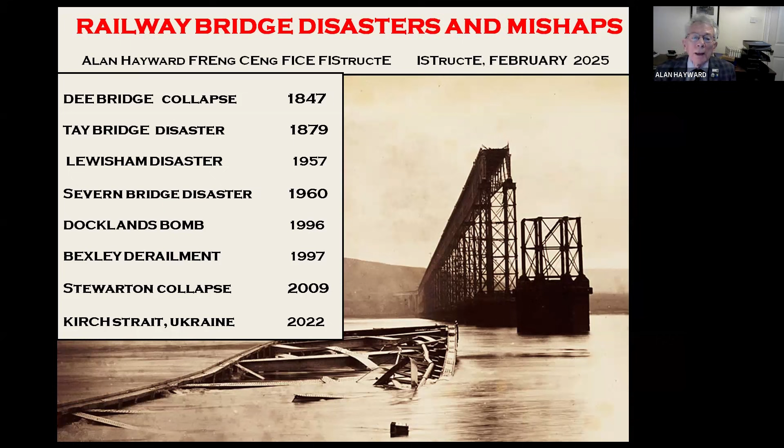The Dee Bridge then we'll cover first of all. The Dee Bridge was designed by Robert Stephenson in the mid-1840s, and it carried 3 spans over the River Dee just outside Chester, 3 98-foot spans, and was unusual construction because it was this cast iron stroke wrought iron trussed girders, which was in vogue at the time. There were about 60 bridges of this type around, going back to the 1840s, so it was quite a popular method of construction.

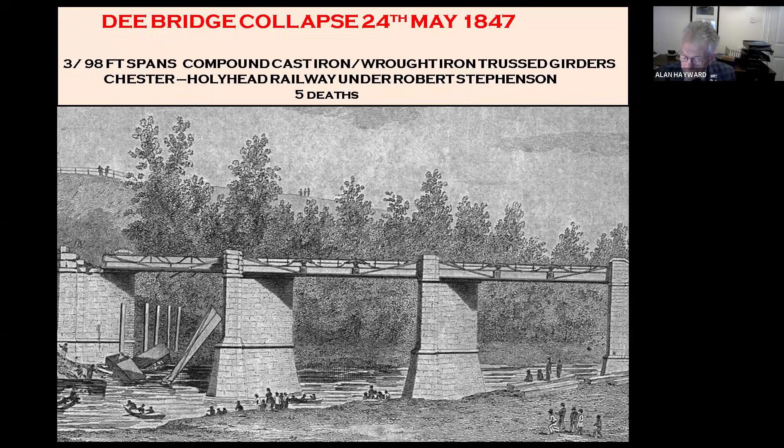But you can see here that on the left-hand side of the drawing there, that one span has partially collapsed, and there are remains of a train in the river, which was, of course, a disaster. 5 people were killed. So we'll go through what actually happened.

This bridge was constructed as part of the Chester and Holyhead Railway under Robert Stephenson, and he had finished the Dee Bridge some 6 months before the time of the collapse in May 1847. But another railway, the Shrewsbury and Chester Railway, was at a more advanced stage, and trains were already using the Dee Bridge under running powers, although the bridge had been built and was owned in effect by Robert Stephenson. So we have an interesting situation: the train which collapsed with the bridge belonged to the Shrewsbury and Chester, but the ownership and construction of the bridge was by the Chester and Holyhead under Robert Stephenson. So you have an immediate contractual situation.

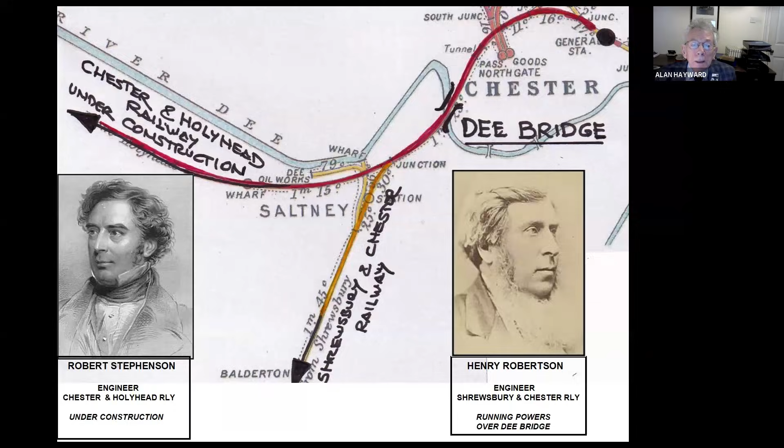So what happened on this day in May 1847? A train left Chester, bound for Ruabon on the Shrewsbury route, not the Chester and Holyhead. It departed 5 minutes late, so the driver was in a bit of a hurry. By the time he got to the bridge, which was only a short distance away, really 2 miles at maximum from Chester, he was doing about 30 miles per hour.

That doesn't sound very fast, but at the time that's a fair old speed actually. So he reached the bridge at 30 miles an hour, and as the locomotive got to the third span, it got across 2 spans, all right.

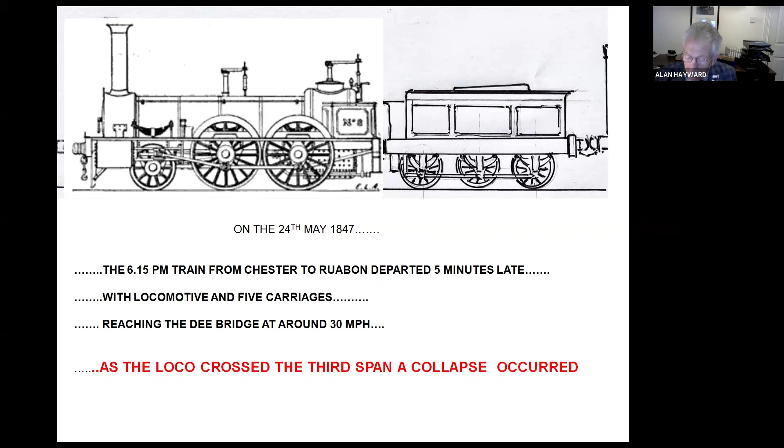A collapse occurred. You can see the locomotive looks a pretty old-fashioned thing, a very low-slung thing. This was a Stephenson patented long boiler locomotive. He made them with long boilers, so they were low down, giving more power in the boiler - a large boiler, but long and low down, so that it didn't sway around too much, because these early locomotives suffered from swaying or yawing.

So the train reached the third span, and the description I've given there comes from the driver's information at the inquest, the evidence he gave at the inquest. As he got to the third span, he felt a sudden sink.

The engine made a rear up, and we plucked it away. The tender sunk with the bridge, but we got it out. So the engine got across the bridge. The tender just about made it and landed on the abutment. And the 4 or 5 carriages, which are all very frail 4-wheel timber things, collapsed into the river.

The driver stopped the engine, realized that the stoker or fireman had already fallen off and been killed instantly. But the driver drove on to the next junction, reversed onto the other track, and went back over the bridge on the other track - which was a brave and perhaps foolhardy thing to do - to set up the warning and stop all trains.

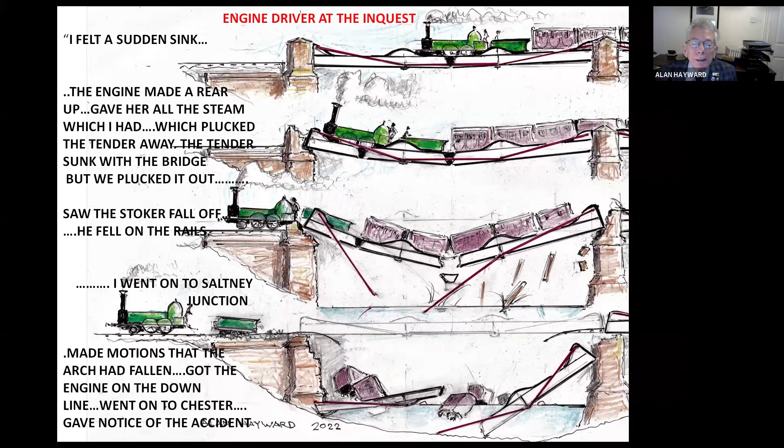So what was the bridge really composed of? Each track was a separate structure, having 2 cast iron girders, one each side, and spanning between. The deck construction was 9-inch square oak beams just resting on the edges of the flanges of the cast iron girders, with a timber floor on top. There was nothing in the way of lateral bracing at all, so the lateral stability of this bridge was almost zero. But the construction of the girders was the unusual thing.

Cast iron, of course, you were limited in the length you could practically cast - to about 40 feet. So faced with a span approaching 100 feet, they would splice 3 lengths of girder together, reinforced with this bulbous part over the top, and the thing was all bolted up. It was then reinforced to give extra strength, so they hoped, with these inclined wrought iron members, coupled at the third points to the bottom of the girders, and then angled up to engage with the ends of the girders, which had upstands at the ends.

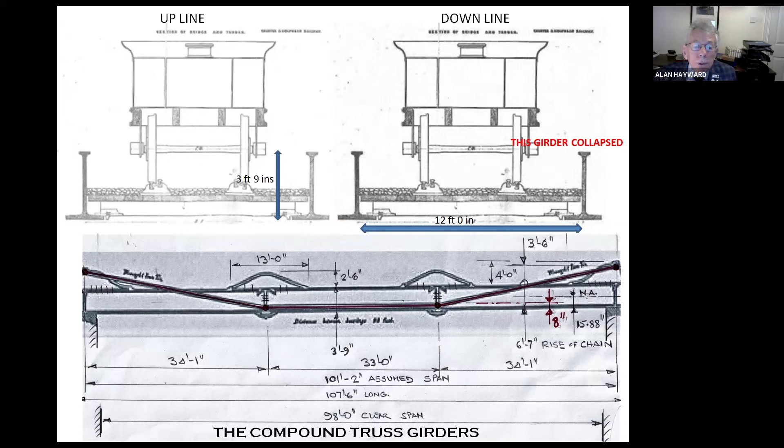So you had a sort of catenary arrangement of these chains. It was a compound truss, and the idea was you had the combined strength of the cast iron girder, which was of limited strength, strengthened - we hoped - by the wrought iron chains.

And the theory that was used assumed that the strengths of the cast iron girder and of the chains could be merely added together algebraically, having equated the deflections. The assumption for the wrought iron chains was that they were anchored at each end to an imaginary solid wall, if you like - in other words, a rigid arrangement, so that it would act as a fully restrained catenary. That was the idea.

So the sum at the bottom there is just working out the strength, assuming that the cast iron had an ultimate strength in tension of 6.5 tons per square inch, which was a fairly conservative measure of the ultimate strength of the cast iron in tension. So you added these two strengths together and then worked out your live loading and dead loading, and an apparent factor of safety against collapse of 4.3 - in other words, more than 4. And Stephenson had expected a factor of safety of at least 3.

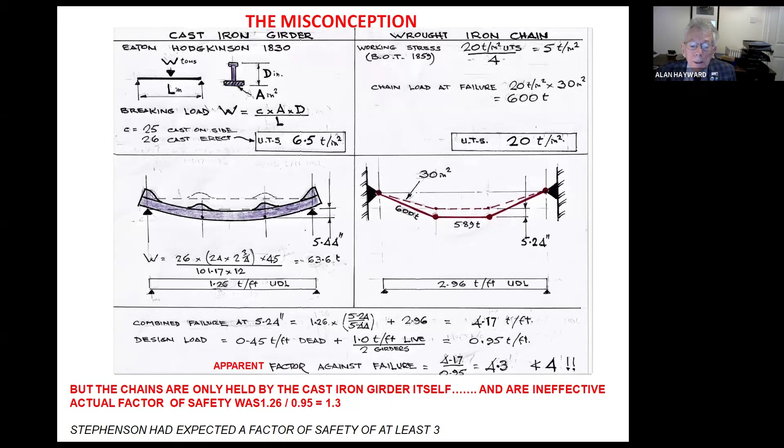This whole thing was a misnomer, really. And the best way I can describe it is this rather silly way of imitating: a man gets into his very flexible bed, which seems to sag in the middle, with bed heads which extend up at the ends, and he decides, I want to stiffen this bed up. So I'll get a strong piece of rope and anchor it rigidly at the ends to the bed heads, and anchor it underneath the bed itself, and that will surely make it a lot stronger.

But he jumps into bed and it deflects the same amount. The ropes or the chains are of no use whatsoever, because what they are doing is pulling in the ends of the girder and giving an additional bending moment. In fact, the bending moment, if you work it all out, is exactly the same as if the rope or the chains were not there. I won't bore you with the mathematics, but if you go through it, you'll find that the ropes or chains in this system are of no use, simply because they are anchored to the thing you're trying to strengthen.

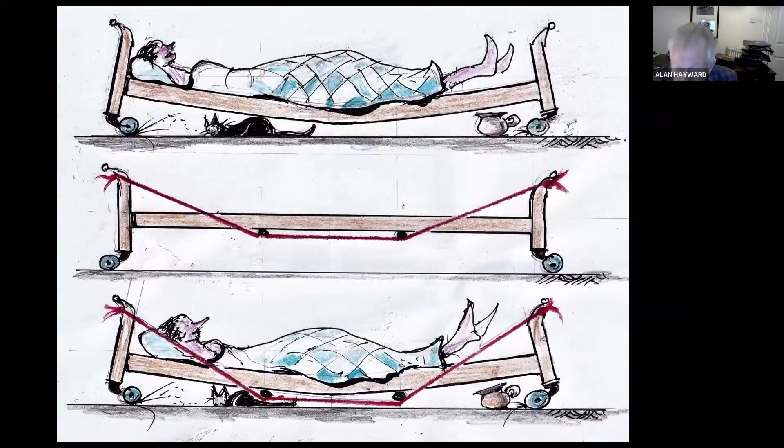So what caused the collapse of the bridge? Was it just due to this misnomer? Well, in fact, it was mainly due to that. So the main cause is the misconception, because if you just take the strength of the cast iron alone, you get a factor of safety not of 3 or 4, but of 1.3, which is dangerously low, of course.

But there were other factors on this bridge - straws which broke the camel's back, I called them. The first one is that they put some ballast onto the deck on the very day of the collapse. Stephenson had this ordered because he was afraid of fire hazard, because a bridge on the Great Western Railway under Brunel a few days before had caught fire and damaged cast iron beams underneath. So Stephenson got worried and thought he'd better do something about this on the Dee Bridge, and put some ballast down. But that ballast, additional weight, reduced the factor of safety now down to 1.1.

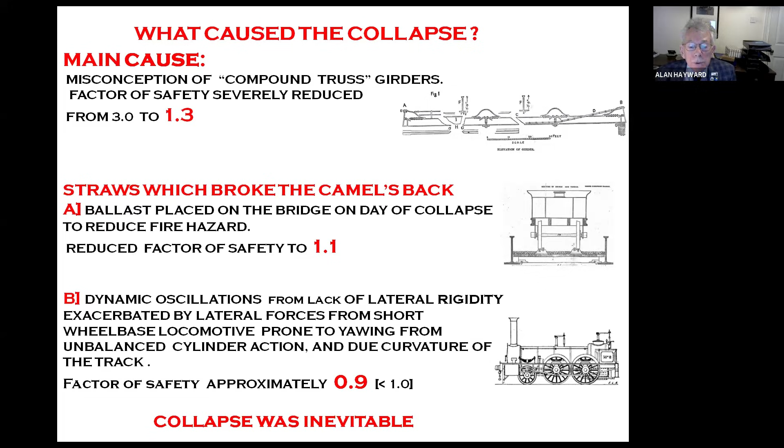And then the other major factor is dynamic oscillations from lack of rigidity of the bridge. That was made worse by the behavior of this locomotive - you can see there the locomotive. The natural frequency of the driving wheels and of the reciprocating cylinders was almost the same at 30 miles per hour as the natural frequency of the bridge, about between 2 and 3 hertz. And laterally, very difficult to work out the lateral natural frequency, but I had a go at it, around 2 hertz. So you had a structure which was very shaky vertically and shaky horizontally under this particular train at this speed. That was really one of the straws that broke the camel's back.

The other feature you'll see in the photo, the locomotive is shown with no outside cylinders driving the driving wheels because they're on the inside, but the actual locomotive had outside cylinders, and that makes a terrific difference to the yawing action that you get from reciprocating parts, and in fact doubles it. The lever arm you get of outside cylinders is literally double that of inside cylinders. So that caused an additional effect.

I had to look very hard in all the evidence to find a statement by Henry Robertson, who was the engineer for the Shrewsbury line. Hidden in his text, it says the loco had outside cylinders. I almost picked that up by chance, and it never appears in all the evidence that it was a factor, but I believe it must have been.

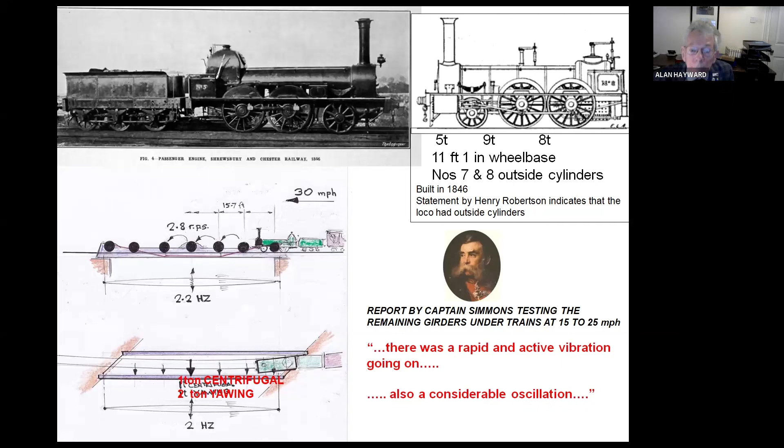So what happened about all this? The bridge collapsed. What are we going to do about it? Bearing in mind there are 60 similar bridges built since 1839 by leading engineers. I mean, these are not nobodies - Vignoles, Hawkshaw, Bidder and Gooch. All renowned engineers had all fallen into the same trap. So it's quite difficult to blame Stephenson alone. He was the fall guy, really.

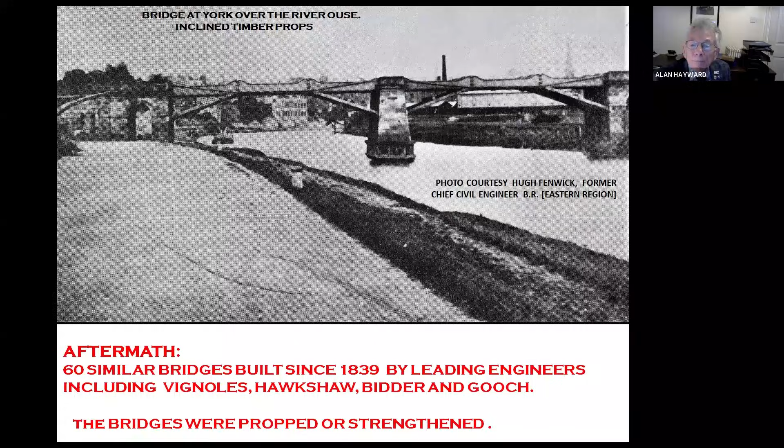So all the bridges had to be either propped or strengthened. You can see in the photo some propping, timber props being used there to prop the third points of the span. At least one bridge of that type remained like that for 60 years in that form. And of course, fully propped, it was okay - you cut the span to sort of 1/3 of the full span. But obviously these bridges were then banned.

And there was a government report, the commissioners reported on the application of iron to railway structures, and that totally banned this type of construction, and said the compound truss system abandoned, higher factors of safety now up to 6 they wanted on cast iron, axle loading must be considered, which it never had been before, and dynamic effects must be allowed for, and wrought iron should be encouraged, not cast iron. So that's what came out of it.

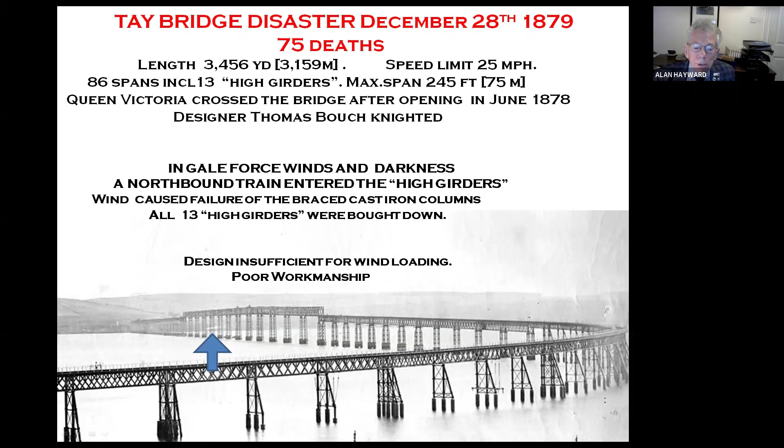This was just after Christmas, 1879. Gale force winds, it really was a howling gale, and darkness, of course. As a train entered the high girders, a collapse occurred, and in fact all 13 of the high girders were brought down as one. I believe they'd all been previously weakened, which we'll go through in a minute.

This is just before the opening of the bridge. You'll see that the trains run through the girders, and it's a single track bridge - this is part of the problem. Very narrow bridges are, of course, more vulnerable than wide bridges. So it's only a single track.

The diagram at the bottom shows the 13 spans, and the place where the collapse originated from was right there.

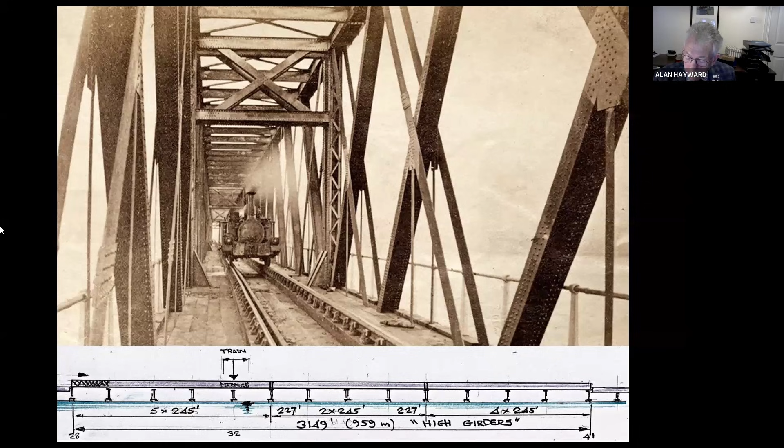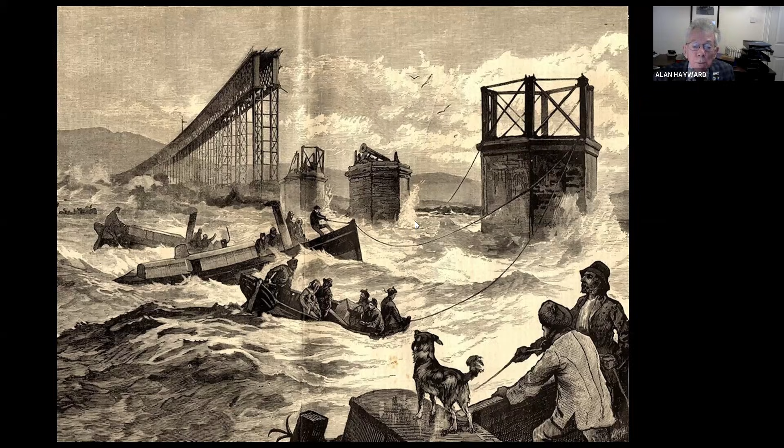The next morning - that obviously lost the train, lost the bridge. An interesting comparison: the height is 36 meters overall, not as high as Nelson's Column, but getting on that way. And interestingly, the weight of one pier with the bridge on top is about 345 tons, whereas the weight of Nelson's Column is 2,500 tons.

And that's really part of the clue to the collapse as well. If you've got a lot of weight, you're less likely to turn over. A very light structure is extremely vulnerable.

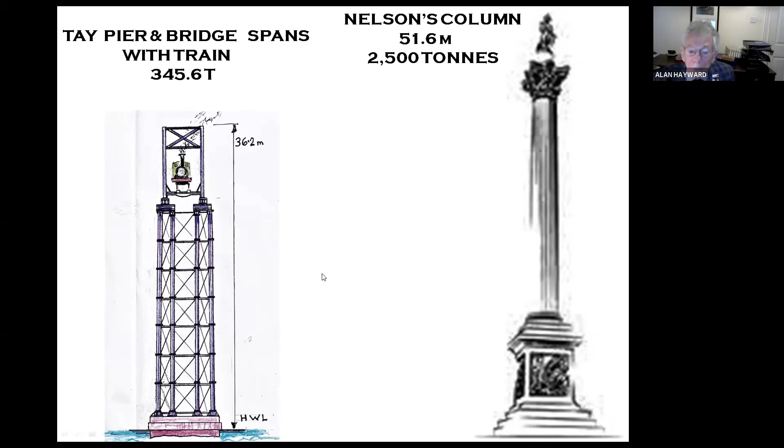The design of the bracings that joined the cast iron columns together was a pretty dreadful bit of design, actually. They were each of flats about 5 inches by half an inch thick, which were connected at each end by a single bolt. And you can see here at the failure that the bolts are really just pulled out of the casting.

That's one fault. The other fault is that all these bracings were tightened by a gib and cotter arrangement, which was a sort of folding wedge. But who would think of doing that on a permanent bridge? It's a dreadful piece of work, to expect a bridge to remain rigid when you've just got these driven-in wedges.

In fact, in the two years after the bridge opened, maintenance people were going around banging these wedges in to keep the ties tautened. They experienced that the bridge was really shaking around when trains crossed it and in the wind - the whole thing was just so shaky. To expect permanent bridge work to be reliant on just folding wedges banged in with a hammer - and of course they loosen up under load and under wind loading. So that was a real omission.

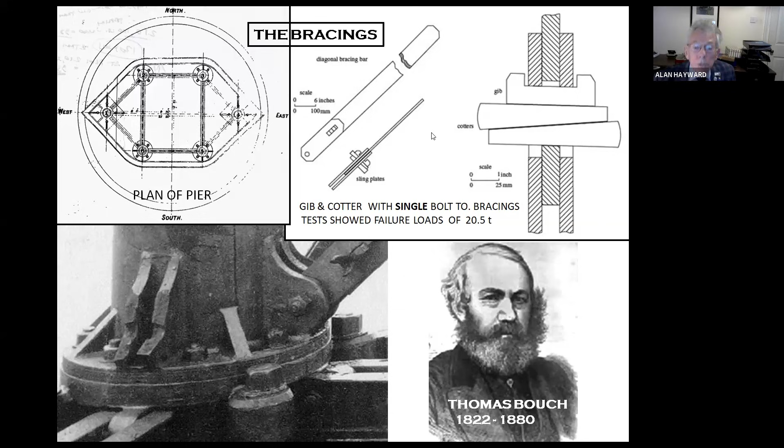But the other major thing really was that the lack of design on the bracings was the wind loading, which Thomas Bouch had assumed - he had assumed 10 pounds per square foot as wind loading. And where did he get that from? Well, he got it from the fact that at the time he was designing the Forth Bridge, which hadn't been constructed yet, and his design was a suspension form of structure.

Other engineers, such as William Barlow, consulted the Astronomer Royal about what wind pressure should be assumed on the Forth Bridge, and he came out with 10 pounds per square foot. Whereas, of course, the Tay Bridge is a series of very small, comparatively short spans, where the wind loading would be much more concentrated, such that you would expect perhaps 40 pounds per square foot.

So immediately, Bouch was under-designing anything which was under wind loading, which would be the piers. And to an extent, I think he was misled - I think it has to be said.

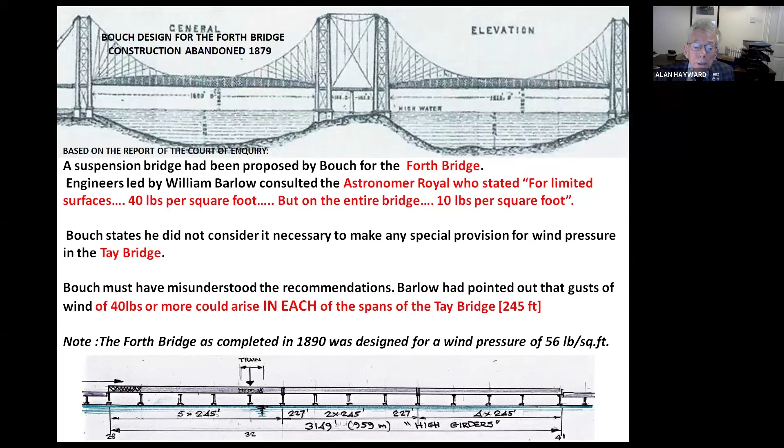Although he was responsible as the designer, he took this 10 pounds per square foot, and he was actually asked after the collapse, and he did not consider it necessary to make any special provision for wind pressures on the Tay Bridge. So this is the root of it, really. After the collapse, his design for the Forth Bridge was abandoned, and a totally different set of designers, Baker and Fowler, were brought in to produce a far more rigid structure suitable for wind loading. You can see how he was, I think, misled, but he was still responsible.

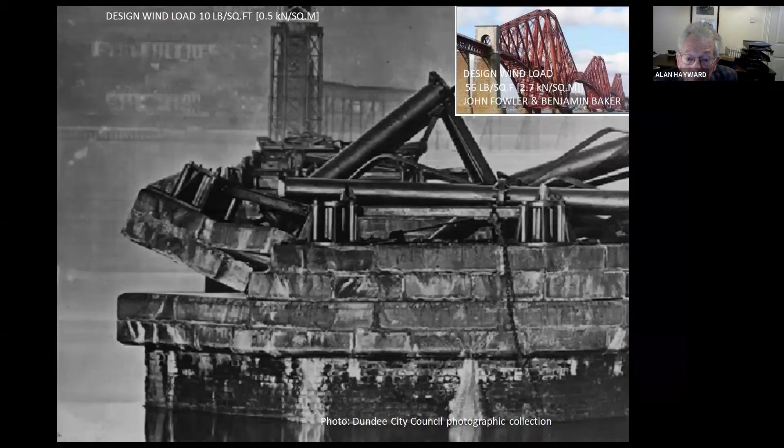You can see here one of the photographs - there's a photographic collection in Dundee City Council. You can see here the pull out of holding down bolts. Notice those holding down bolts only went into two courses of masonry, which was totally inadequate for any significant wind loading.

The Forth Bridge, as eventually built, was designed for a much higher pressure of 56 pounds per square foot, which is more or less the sort of pressure we might use today. The Forth Bridge is a fine structure that's still standing, over-designed in some ways, but thank goodness it was.

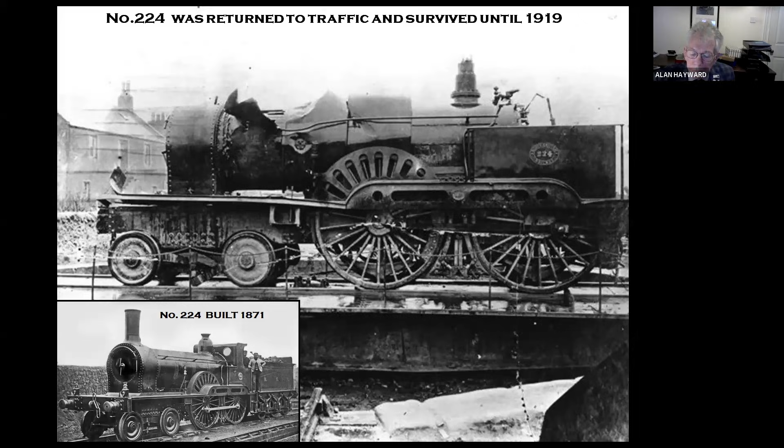They got the locomotive out - it was found inside the girders when they got them out, and that locomotive got rebuilt and survived, carrying trains up to 1919. But no driver would ever drive it across the Tay Bridge - not surprising, is it? They rebuilt the Tay Bridge alongside for 2 tracks, which made it much more rigid. You can see these massive structures forming the columns of the piers now, so we have a much more rigid structure, which is still there today.

So that's the Tay Bridge. I'll move on to the Lewisham rail disaster. We move into the next century, 1957 - a very tragic disaster because 90 people died.

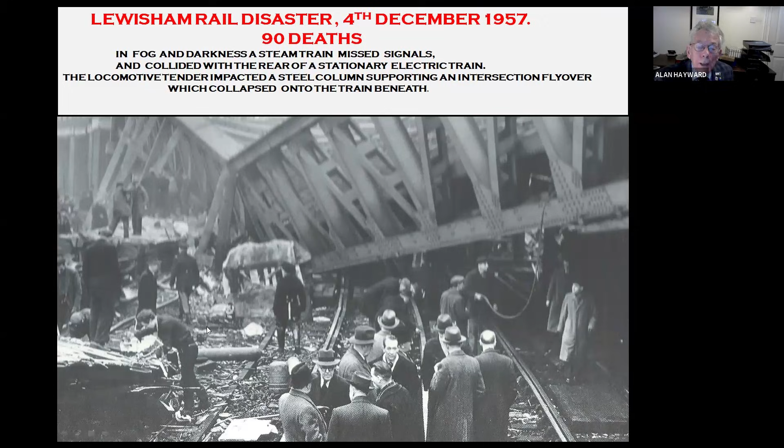It was caused by a train which ran through signals. The driver missed signals and collided with the back of a stationary train in front of him, right underneath this bridge - a 2-span girder bridge carrying rail traffic above - and hit the column supporting 2 spans. The 2 spans were simply supported and simply collapsed onto the train, and that's where all the deaths were, really, inside the carriages which were underneath the bridge at the time. A really tragic disaster.

Well, really, what caused it? This is going a bit beyond structural engineering, but this is the route coming out of London. It shows a straight track diagrammatically, but it was actually quite a curvy track, as you see at the top there, with quite a lot of bends in it. The cross section shows it's 4 tracks, and the train, which was a steam hauled train...

...left London in fog and darkness just around Christmas time, and the traffic had been very delayed by fog. The trains were all in the wrong order, so it was all a bit disorganized. The 4-track arrangement - you can see the 2 inner tracks are close together and the outer ones are spaced apart. This was because the station platforms intermediately were in these spaces called the 10-foot, whereas the space between the 2 middle tracks was the standard 6-foot - we call it the 6-foot.

The engine was a left-hand drive engine, fairly modern construction, 1940s to 1950s, which was left-hand drive. Most of the old engines pre-war were right-hand driven, so we had an immediate disadvantage that the driver was on the left. The signals couldn't be put in the space between the two middle tracks - they were on the right-hand side. So the driver was on the wrong side, if you like, and he was reliant on the fireman who was on the right-hand side looking at the signals.

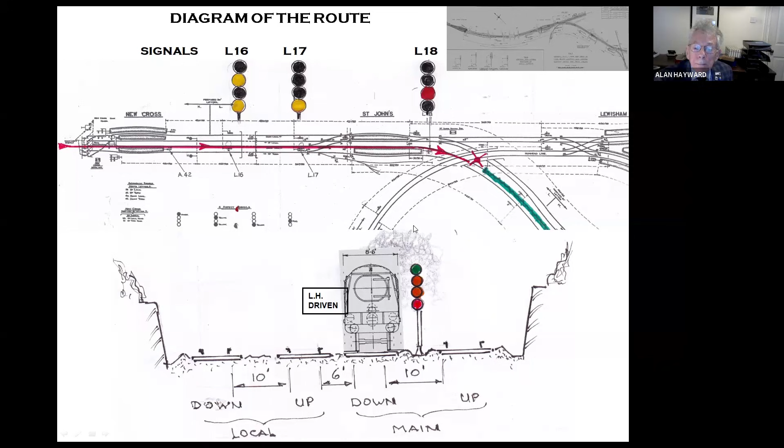See here, that's the top view, just shows the locomotive, which they rescued afterwards. It went back into traffic. You can see there's the flyover, the route carried by the train, which collapsed, impacted the bridge, is where that green arrow is.

So on a curve, curves are always bad news. Things always happen on curves. The train hit the back of the train in front of it, and the tender of the locomotive flipped sideways, hit that column. Taking that column out, of course, you had an immediate collapse situation.

A feature of the locomotive was, with this streamline type, Bulleid Pacifics they called them, this particular one was built with a cab which is narrower. It was only 8'6" wide instead of 9 foot, because it had been built for a route with restricted clearances in tunnels.

To suit, because of very restricted clearances in a tunnel, which meant that the forward visibility, you can see there, the driver's got to look through that very narrow screen, whereas most of the normal locomotives had a wider cab, 9 foot wide, which gave you additional vision. That's one of the factors. I mean, it's not the only factor. The driver should have been paying attention, but it's a factor that he missed the signals.

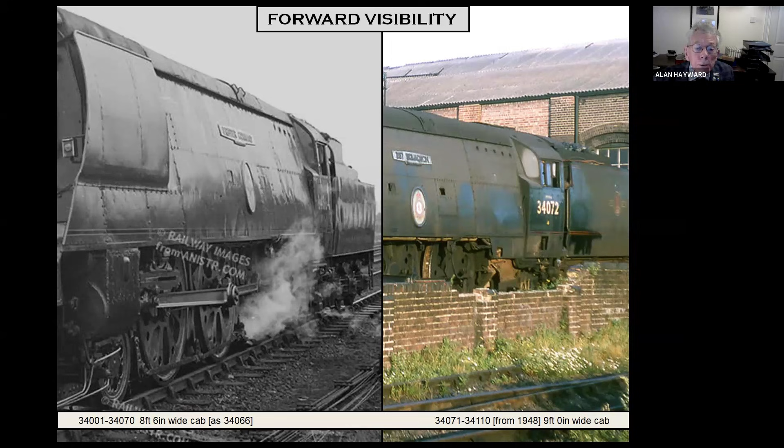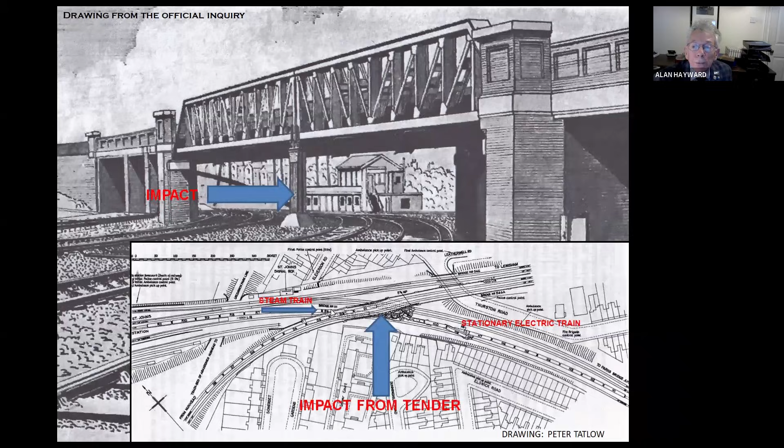You can see here the column which was collapsed was a steel column made of multiple UB or joist sections. The holding down bolts were not really adequate to take any huge forces. So my calculation is the force to topple the column could be between 50 and 100 tons, quite difficult to work out depending on the anchorage of the bolts. Whereas the actual force, I predict, could have been much higher.

If that bridge was built now, the rules are that you always put columns at least 4.5 meters away from a railway track. That means you're much less likely to damage the column or hit the column indeed.

Today, you would have to design that column for 200 tons. So it might not save it, but it's a big help.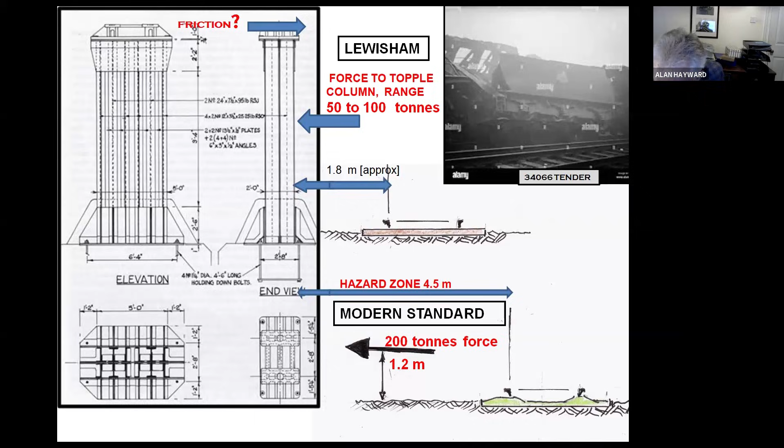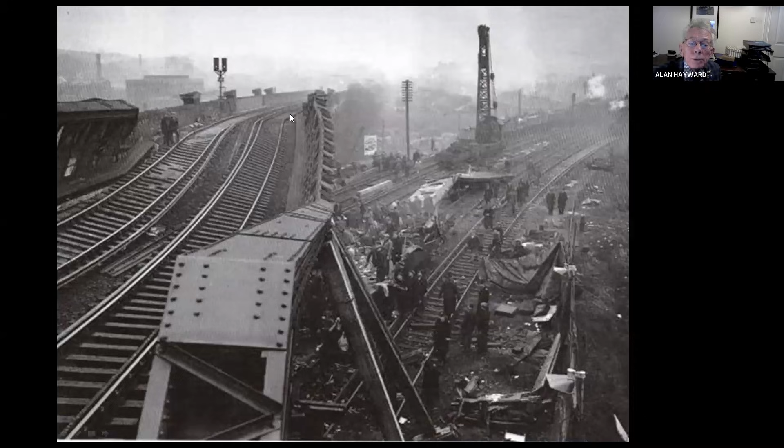That's just a view showing the clearing up operation. It was very lucky in that a train was actually, at the time of the collapse, coming along here. They stopped it just in time, and that would have made it even worse.

Well, the bridge is still there. They put it back, such as it was, using a massive military trestling. This was stuff that was developed in World War II. It actually came from Colonel Everall, that came out of India.

He developed this system of military trestling, which was used during wartime to repair bridges throughout Europe, in fact. Some 50,000 tons of this stuff were made either in the UK and in the USA for restoring bridges after World War II.

And this bridge, after 1957, they've used this here to support the bridge. That bridge is still there, supported by the same military trestling. Pretty good stuff, actually, and you can still get it. It's now called Mabey HYMAT 75, and you can hire it. So it's pretty good stuff.

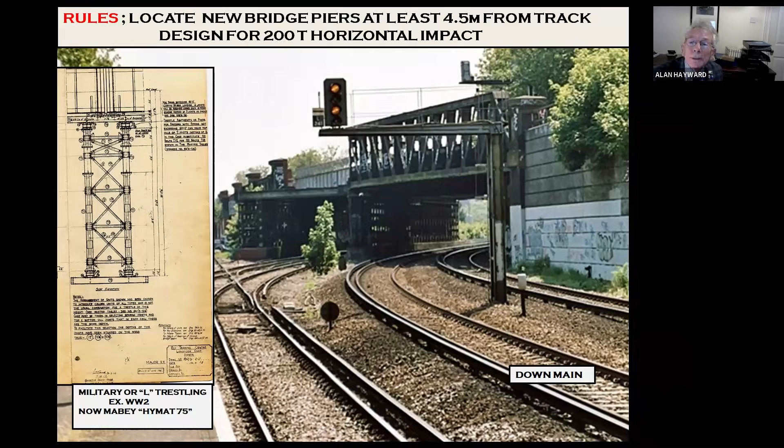So that's that one. So pretty dreadful.

Now we move on to another one, the Severn Rail Bridge disaster. I gave a talk about this probably a few years back. This bridge was built in 1879 to carry coal out of the Forest of Dean to be taken across into England, but it never took off. Forest of Dean coal never really did anything - there were a lot of strikes, industrial action and so on, and it never really worked. But the idea was to connect the Forest of Dean, which had quite a system of railways to get coal out, and the bridge was built to cross the River Severn and get out onto the main railway system.

But what happened - in thick fog, here we're back to thick fog again, at night, two petrol barges collided with one of the piers, that's Pier 17, just there. The vessels which impacted the pier should have gone through one of the navigation spans, but they were lost in fog and drifted on the incoming tide of the River Severn. Now the bridge had 22 iron truss spans, cast iron columns, concrete filled, and two bigger spans on this side of the river where the deepest shipping channel was, whereas none of the other spans here were suitable for shipping. You can see at low tide the sand gets totally exposed.

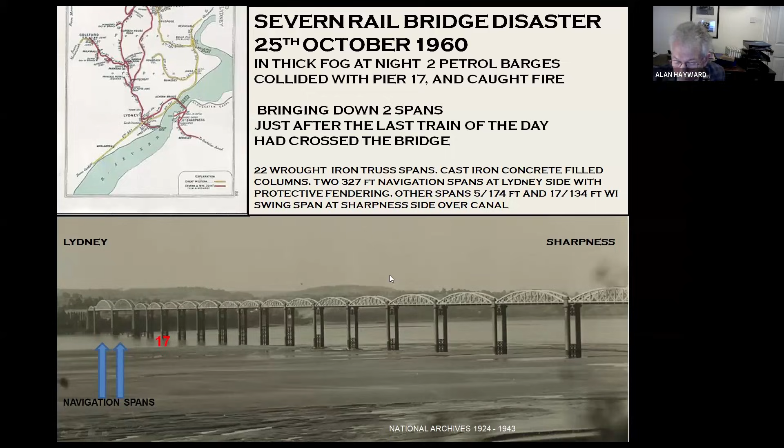The bridge, as I say, was built in 1879. It was a white elephant really, and the traffic when we move on to the 1950s was just this sort of 2-coach push and pull, which went across the bridge about 5 to 6 times a day, plus a few coal trains. Pretty surprised they kept it going for so long.

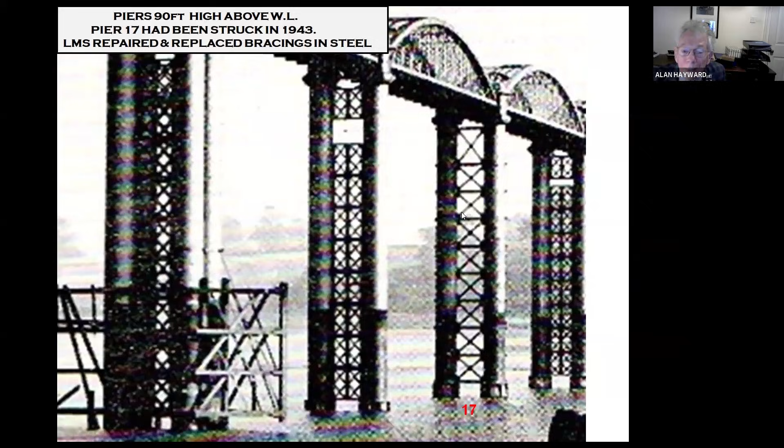And yet Pier 17, which was the one that got hit, you can see there - you can immediately detect that the bracing in that pier is different from the other ones, and I shall come to that in a moment. Because in 1943, middle of the war, a vessel struck Pier 17 and severely damaged it, and the bracings, which were cast iron, were replaced by steel members, which obviously made it more rigid, more secure, and the bracings went full height, whereas a lot of the other spans had bracings with gaps.

And some of the bracings - going back to 1879 - they actually put additional ones in because the Tay Bridge had just collapsed and they got scared. So that's why there's quite a lot of bracing, whereas in the original design a lot of these bracings were put in later, after 1879.

So you can see immediately here, it is strongly suspected that the 1943 damage probably weakened the bases of the columns. There's no evidence for that that I know of, but apparently at the time a vessel hit this pier in 1943, bolts joining the superstructure onto the columns were fractured and sheared. So it was obviously a pretty significant event.

Part of the problem was that the repairs in 1943 were done by the LMS, that's London Midland Scottish Railway, which had taken over the bridge from the Great Western Railway. So this change of ownership is, I think, a problem as well, because in later years the ownership went back to the Western region of British Rail. I think that doesn't help.

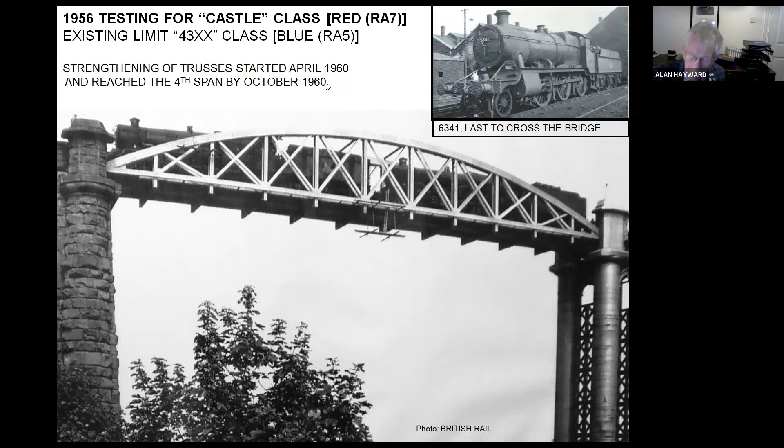And so they did some testing here, quite elaborate testing from the research department from Derby - did a lot of theoretical work, and they were going to strengthen most of the diagonals on all the spans. That work had started in the beginning of 1960, started in April 1960, and had reached the fourth span by October 1960 when things happened.

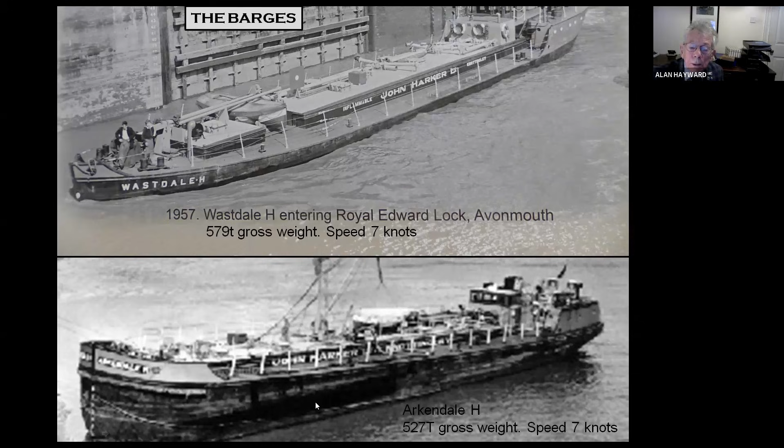What had been happening is since the 1950s there was quite a traffic in oil and petrol by barge being taken up the River Severn from Avonmouth and other places, going northward and up the River Severn, and then as far as Sharpness, which is near where the bridge is, and onto the Sharpness Canal. The reason is that the River Severn is hazardous north of Lydney and Sharpness, so that's why they built the canal - it's a much more secure route. These barges, which had been around since the 1950s, all up weighed about 500 to 600 tons. So these two vessels are the two we're concerned with.

The usual practice on these barges was they would only get into Sharpness docks on a high tide. You have to wait for high tide, and that's the only way you could get in the lock gates. So on high tide they would come in, reverse, and drift backwards with the incoming tide into the docks. That was the practice that had been going on. But on this particular night it was foggy and dark.

These two vessels, the Arkendale and the Wastdale, one had an experienced skipper, the other was very inexperienced. They missed their place doing the reversing and collided with each other by accident, got locked together and were lost in the fog. The tide of the Severn was still incoming, so they drifted towards the bridge, totally out of control, hit the bridge and demolished the pier. Immediately there was a fire created.

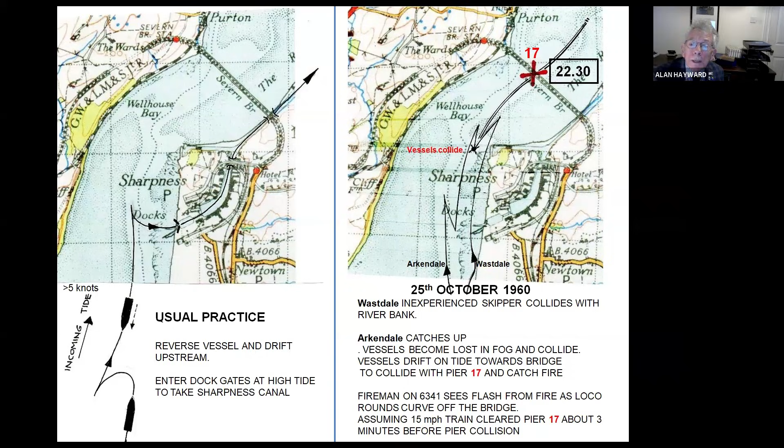That's my crude impression, there are no photographs of this. Five people on the barges were killed by drowning or otherwise. The vessels, all up weight of about 1,000 tons, hit the cast iron column and it just collapsed in on itself, a bit like the Tay Bridge in a way. The next morning, that's what they found: two spans gone, Pier 17 had disappeared, and the vessels, still drifting in on the incoming tide, were found aground just there. 50 years later, they're still there.

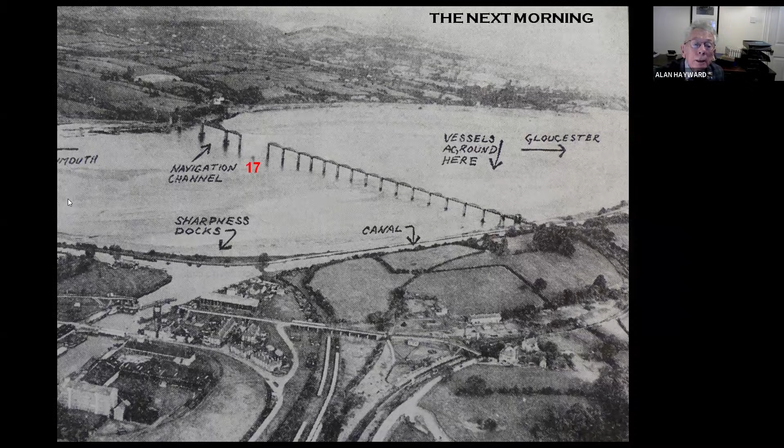Just to go back - the barges should have come into the docks, back to the left, then gone up the canal and under a span of the bridge there, but they didn't make it. They drifted and hit the bridge there instead.

I tried to do some calculations on forces. Impact force, I reckon, is about 170 tons, but the resistance was only about 50 tons. The failure - we're talking cast iron here - the columns were made in segments bolted together with internal flanged joints. The bending caused by the pull of these bolts going into tension caused bending at that point. The evidence from bits of columns recovered is that failures didn't occur at the joints, but a short distance away, so I think it's due to local bending stress plus tension.

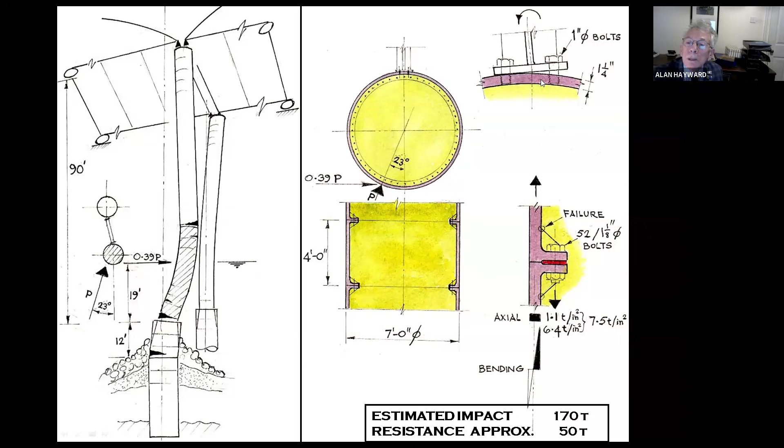That's a bit of an assumption, but I think it's not far out. Also, you were hitting the column not square on, so the bracings were really being forced. The bolts connecting the bracings were only 1-inch diameter, whereas the thickness of the wall was only 1 and a quarter inch. You should have a purchase of a threaded bolt of at least twice its diameter, not just 1 times its diameter. So that connection was weak as well.

After that there was a prevarication. British Railway wanted to restore the bridge, but Mr. Beeching came along closing railways, so it really wasn't worthwhile. So the bridge was removed. 24 firms were invited for demolition, all but four of them declined - they said it's too risky going in that river, the River Severn is a very hazardous place. Eventually a firm called Nordman Construction, who had never done anything like this before, got the job for 75k.

They brought in a German floating crane to start doing the demolition. But Nordman went into receivership, and the German crane people never got paid any money, so they went home. So British Rail themselves had to take over the demolition, which was finally completed in 1970 - that's 10 years after the collapse. It's a real sad saga, really.

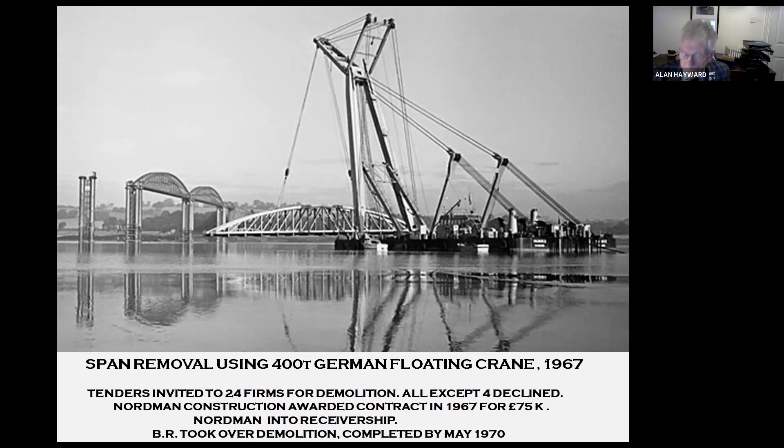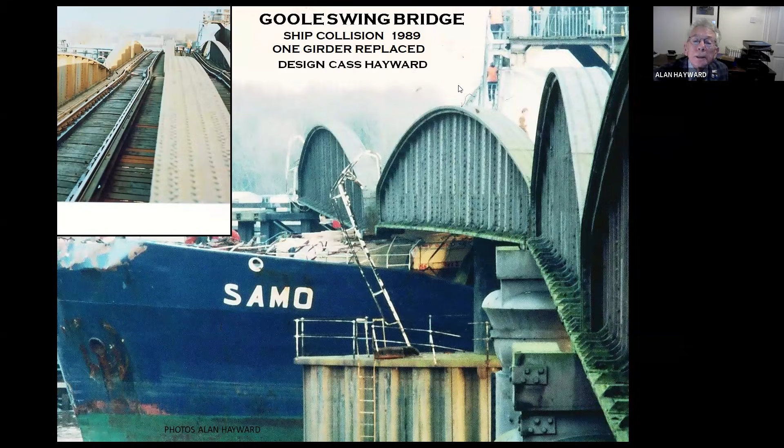I put this one on, Goole Swing Bridge, just for interest - shows what happens when a vessel collides with a bridge. This is not quite like the one in America a few weeks ago, but this swing bridge didn't open in time, so this barge collided with it and bent it a bit. We were involved with designing the replacement girders.

We come on to one I've been involved with. This is not a disaster so much, it's a railway accident at Bexley in 1997. I got involved as an expert witness. It involved a train hauled by two locomotives, hauling box wagons filled with spent ballast, which if it gets wet is very heavy. The wagon which caused the derailment was overloaded - the total weight should have been not more than 100 tons, but it actually weighed 130 tons, which was part of the problem. And what happened?

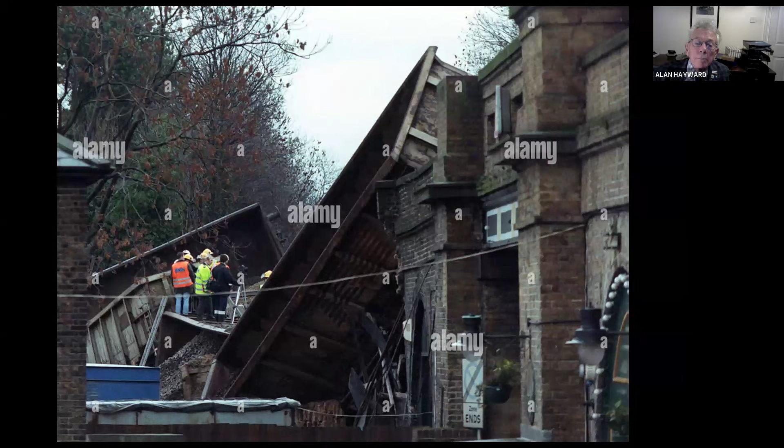A train hauled by two Class 37 locomotives, hauling box wagons, derailed on a bridge. The wagons collapsed off the side of the bridge, causing quite a lot of damage, and 4 people working in arches underneath the bridge were badly injured.

You see there the arches which were badly damaged. There were people working in these arches. But the bridge, which was the problem, is just back here, just out of shot. The train was travelling in that direction, right to left.

So the bridge which caused the problem, what was it? It was a very modest little bridge, only about 10 or 12 meters span, consisting of steel troughs with longitudinal timbers placed in them, and those timbers were just softwood. So there was no direct tie between the rails, except by the timbers contacting the sides of the metal troughs, and over time they had experienced what we call gauge spread.

Gauge spread is bad news. If you get enough gauge spread, the wheels drop between and you get a derailment. But they'd made attempts to tie it together at the ends, which is the only place they could.

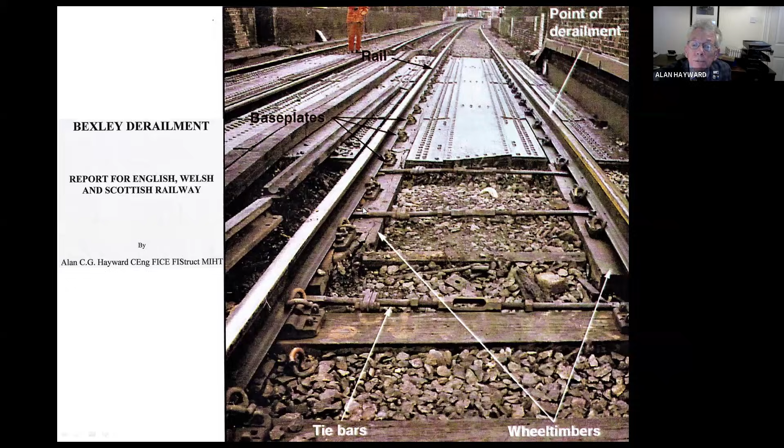So what happened at this derailment is that sideways forces from the train pushed the timbers sideways against the side of the trough, causing what's called gauge spread. You can see the condition of the timber is pretty terrible. The chair screws have worked sideways, the chairs themselves have moved sideways, so the whole thing's collapsing over sideways.

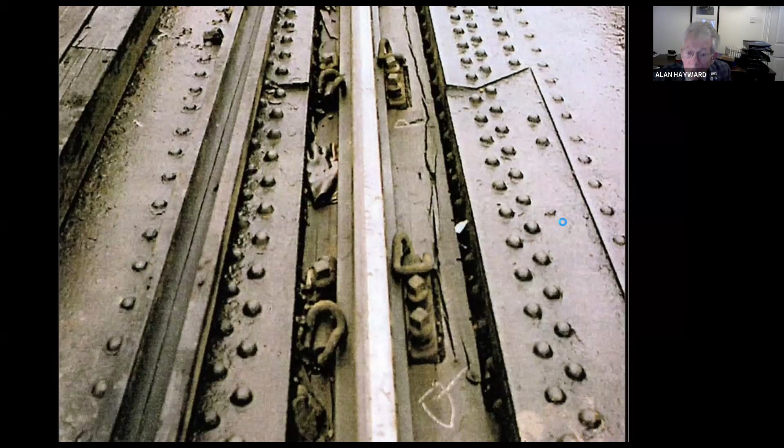I was asked what was the cause of the derailment. Well, there were 3 possible causes. One was gauge spread caused by these rotted timbers. They'd been there for years - the permanent way ganger had been saying for months these timbers are rotten, replace them, and nobody was doing anything about it. The replacement was deferred for months. So that was one possible cause.

The second cause was overloading. The wagon was loaded to 121 tons instead of 102. So you might ask, how do we know the derailed wagon weighed 121 tons? Well, it was shown by the evidence that the wagon which caused the derailment didn't actually turn over, so they could weigh it afterwards, and it was 121 tons.

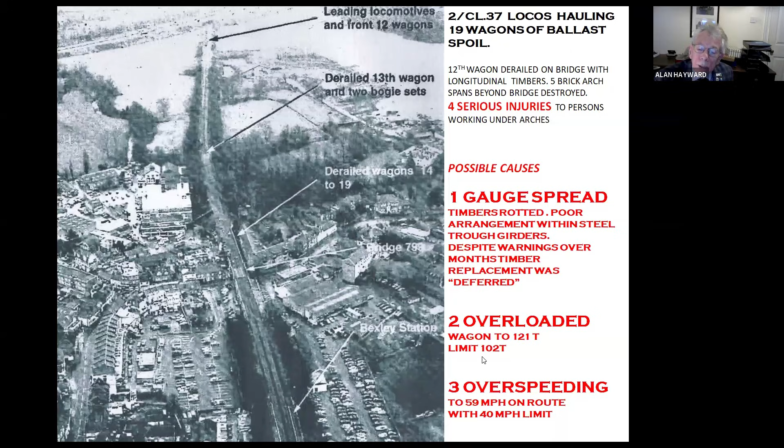So that's a possible cause. And the third reason was that the train was doing 59 miles per hour in a 40 mile per hour limit. So is that a possible cause? I think all those things are contributory. But the overspeeding isn't really, because the 40 mile an hour limit was actually because of curvature on other parts of the line, so I don't think that's actually a cause. The overloading is a possible cause, because you can get sideways forces due to wagons at speed.

So we did various things, made a model, and the immediate thing you see is that these longitudinal timbers are actually 3 bits of timber joined together, and they weren't joined together very well. There were a few long screws going through occasionally, so you really had a classical pack of cards.

And the timbers being so rotten, the chair screws worked sideways, the chairs themselves dug into the timber, so you had this lateral movement. We worked out that the gauge spread to cause derailment could have been 80 mil, and you only need about 70 mil for the wheels to drop between the rails, which is what happened.

All under the forces we call nosing. Nosing is a force you get in any train on track which is not perfect - the thing wanders from side to side, and the nosing allowance is normally 10 tons. It's arbitrary, derived in about 1943, and everyone still uses it, and it's in the Eurocodes as well. It's a bit of an arbitrary force, but it's better than nothing.

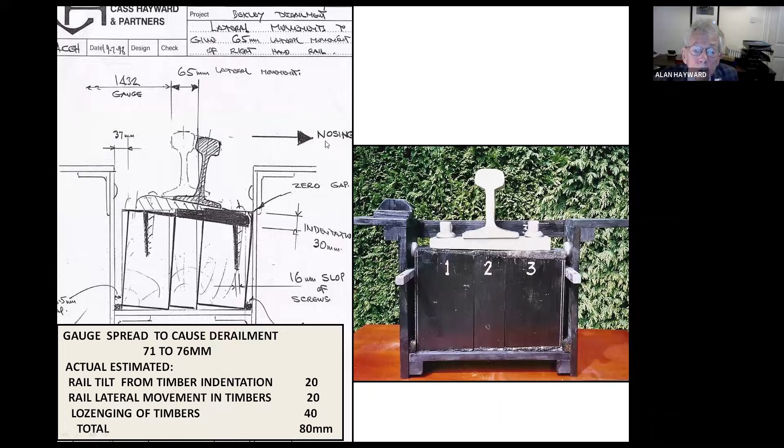We also did a model railway to represent the cantilevering of the timbers, causing the seesawing I've mentioned, which is a possible problem as well.

Well, this business with longitudinal timbers doesn't go away. We're talking about last September 2024, a train carrying, again, a heavily loaded train, aggregate wagons, 9 wagons.

The locomotive got there, the wagons didn't, and we had a derailment. No bridge collapse. The main problem is that the chairs were totally unsuitable for being on longitudinal timbers. Only 2 bolts were used, when there should be at least 3, preferably 4. And these bolts just sheared under lateral forces. The bridge is on a curve, and bridges on curves are always potential bad news.

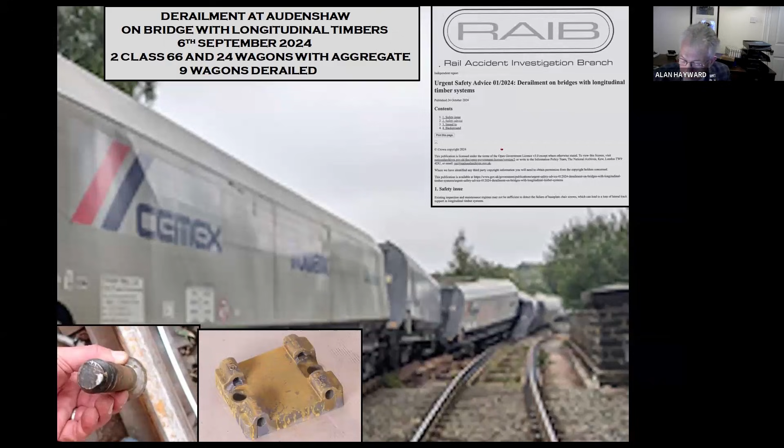So the RAIB, the Rail Accident Investigation Branch, has sent out an urgent safety advice about derailment on bridges with longitudinal timbers. Well, that's scary. I can remember replacing bridges in the 1960s with longitudinal timbers, so it's about time they all disappeared.

Next one I have, just looking at time now, we're moving on, 7 o'clock.

Docklands Light Railway. I designed this bridge across a road. It's very skewed on single column supports, so we used a torsionally rigid box girder construction.

The IRA, one of the last bombs to be detonated by the IRA in Britain, was in 1996. They detonated it almost under this bridge, causing a lot of damage to the buildings either side. You can see the construction here, twin box girders on a single column, which needed to be torsionally rigid.

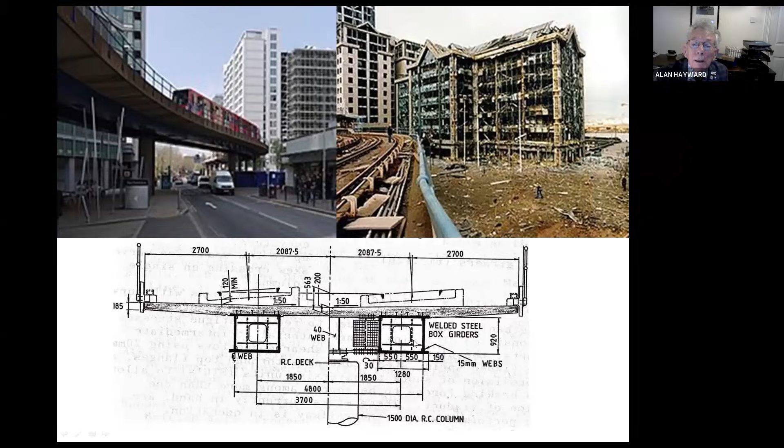The evidence was that the explosion, which had been literally under about there, had lifted the bridge off its bearings and banged back down again. The bearings seem to have survived fine, but there was some damage, not too much. The webs of the box, just on one side, had been indented.

Distorted. So a lot of sums were done on the strength - was the bridge okay still? We decided to put in stiffeners shaped to the distortion. We felt that was a better solution than trying to straighten out the distortion, which could easily cause failures to the welds here. A full inspection was done to make sure there was no other damage, and the bridge has performed ever since.

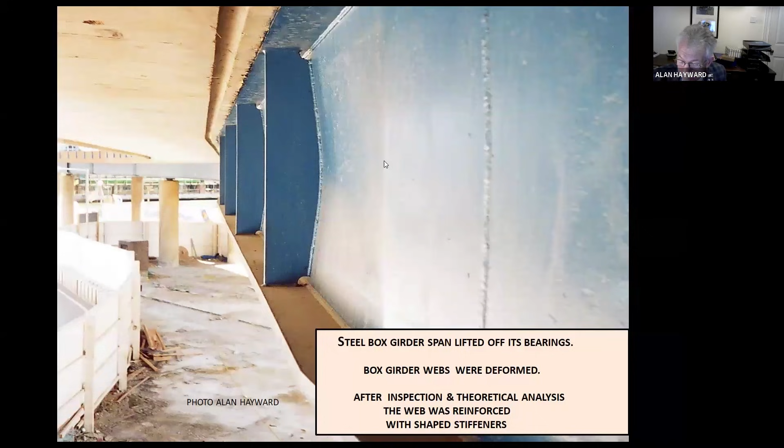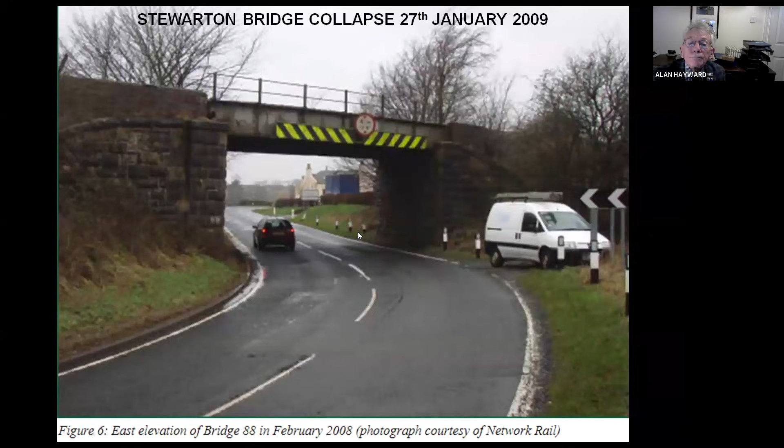Originally there were 2 tracks, there was only 1 at the time of the problem. The ballast was kept away from the side of the girder by timber planks there, and water just seeped down over the years and caused corrosion of the web. The bridge had, at the time of the collapse, been assessed, but the assessor, who I will not name, had assumed that the webs were 1/2 inch thick. Well, they weren't - they were 1/4 inch thick to this outer girder and 3/8 thick under the centre girder. So there was an underestimate of strength.

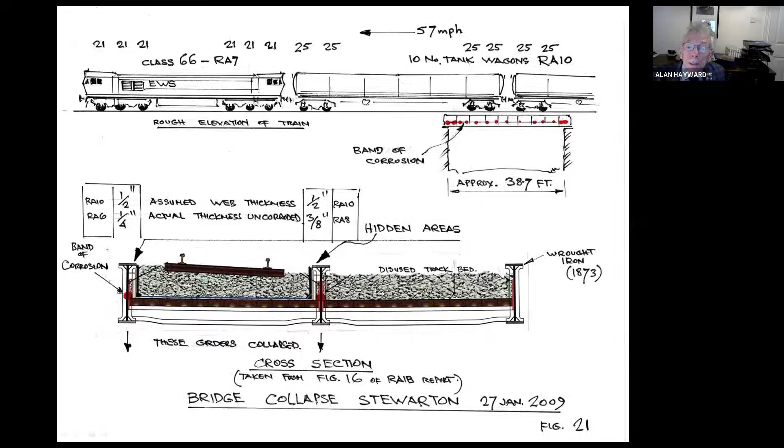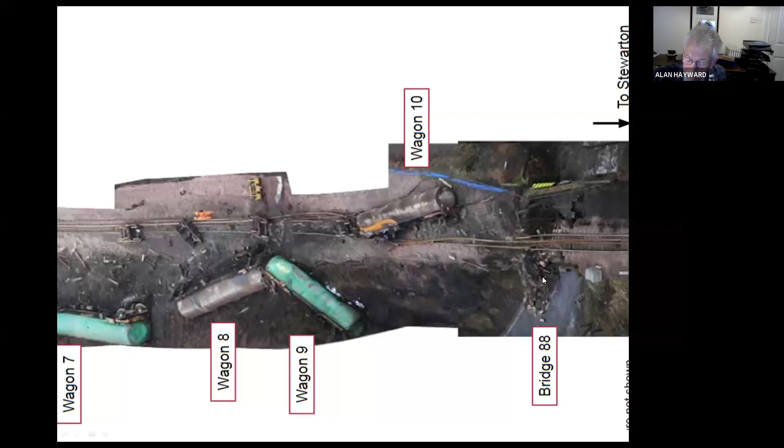The wagons caught fire and went all over the place. The bridge is just on the right there. And there's the collapse - you can see the plane of failure there. At the end, where the shear is highest, of course, the web has totally failed in shear.

Shear failures are the enemy. Bending failures are rare, but shear failures happen suddenly. That's a real lesson, I think it's a lesson for codes of practice really - be very careful about shear.

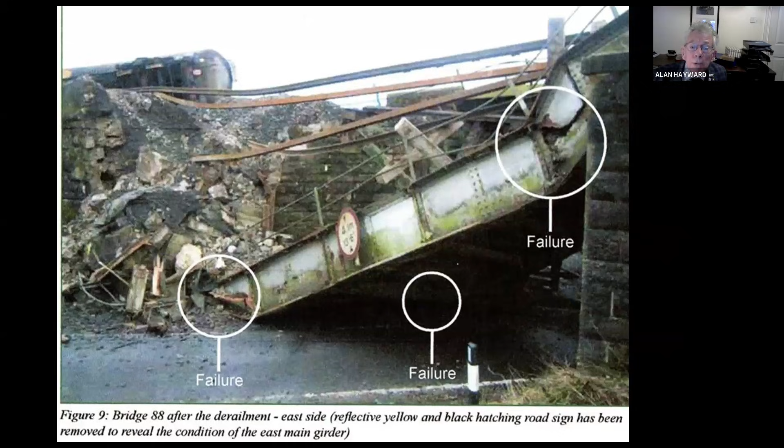Inspection was very difficult, so this thing just corroded, and in the end, one morning, bang, it went. So the lesson really is about hidden parts.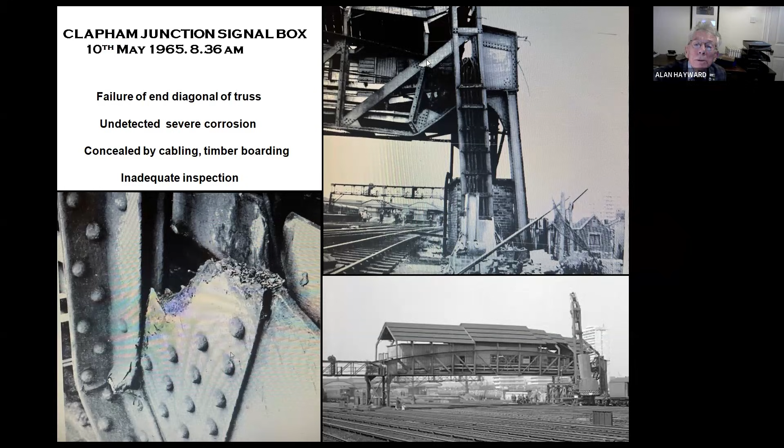This is the last one. I'll skip through this quite quick - the Kerch crossing to Ukraine.

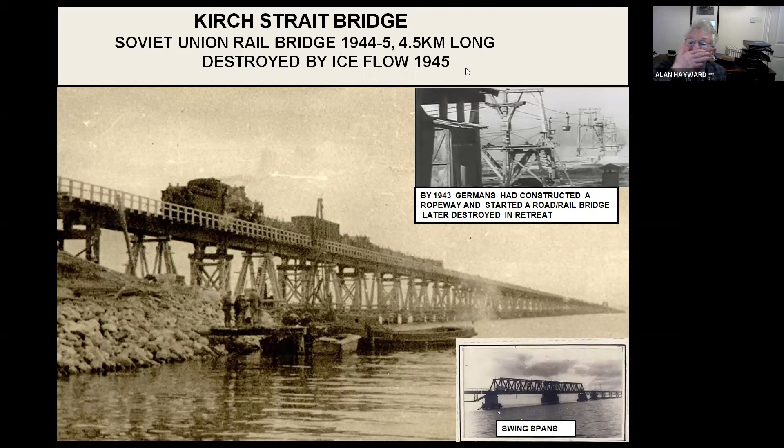But it was destroyed by ice flow in 1945, so they took it down. Then Mr. Putin came along, invaded Crimea, and decided he would build a bridge from Crimea to Russia to replace the one that had been taken down in 1945. It was combined road and rail, and you can see the rail remains on the level while the road goes up and down with a navigation span there. 18 kilometres long, built in 4 years. A terrific achievement.

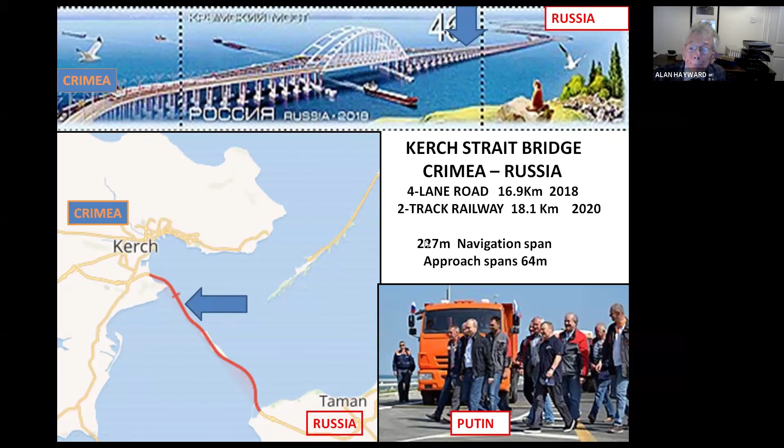But Ukrainians decided to do something about removing the bridge. This shot, you can see traffic moving along there. In the distance, there's a lorry, and next to it, there's another vehicle - it was a car, I think.

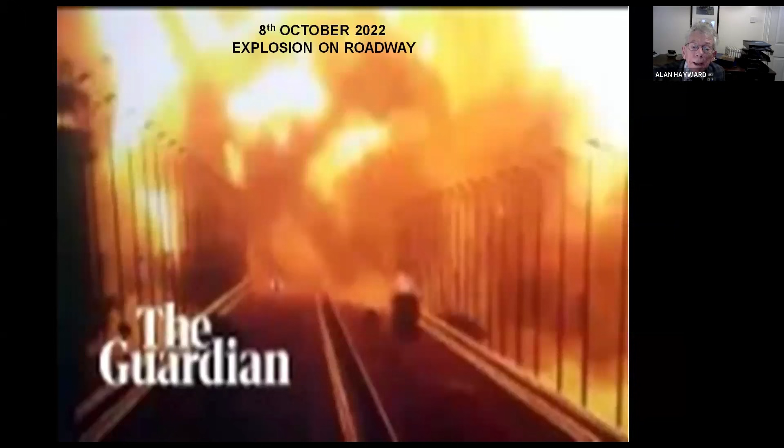That lorry obviously contained some pretty high explosives, because bang - I'm sorry, this sometimes turns into a movie, I don't think it's going to do it tonight. But that's the big flash of the explosion, and the vehicles you could see nearer to you are still there. 2 or 4 people were killed.

We're talking about the road span, and there's the collapse which occurred there. But the explosion was such that a train which happened to be travelling on the rail bridge adjacent with petrol wagons caught fire. Whether the Ukrainians intended that, it's never known, but that train was moving, and the lorry which caused the detonation was there. So did they plan all that? Nothing's ever been revealed. It's surprising if they haven't planned it.

Remarkable bit of planning. And there's the road bridge which has collapsed. The rail bridge, of course, was still there, but that fire burnt for at least 2 or 4 hours, apparently, before they could put it out.

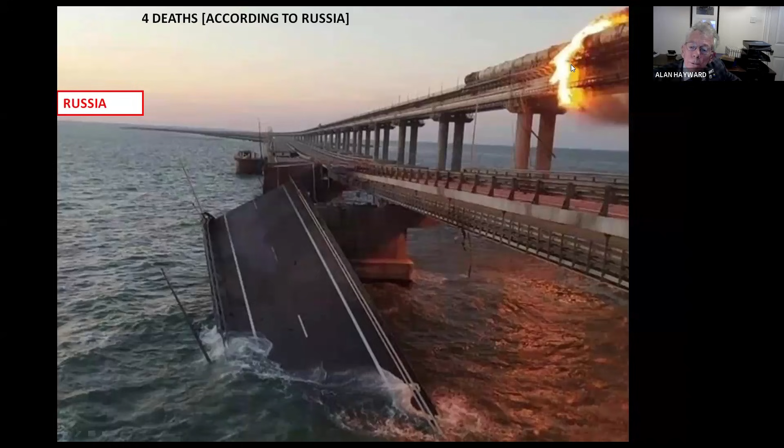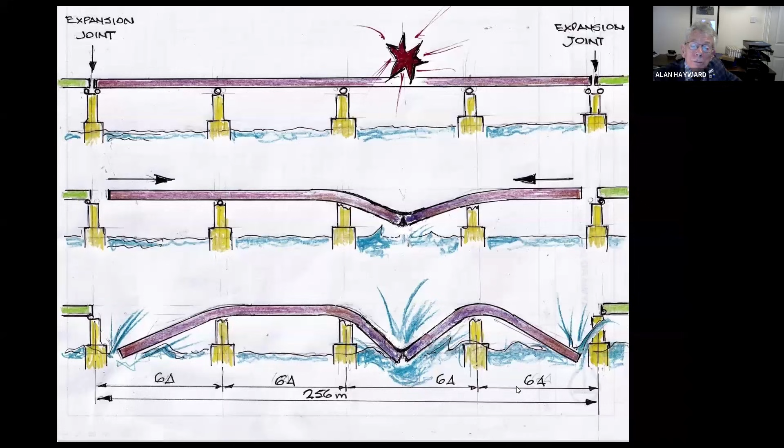And the collapse mechanism - this is my supposition - this is the road bridge now, because it was in sections of 4 spans, continuous 4 spans. So the explosion is there, and you get a total failure and a deflection that pulls the ends in, so the ends drop off the bearings. That's the sort of mode of collapse, I think.

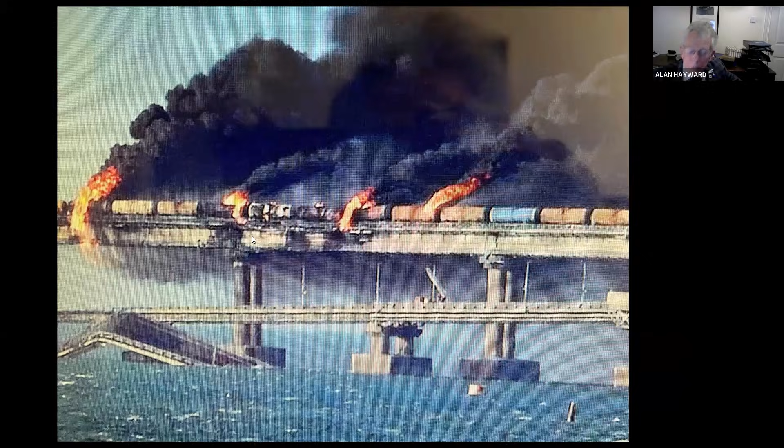And the rail bridge went on burning, but still standing. So what happened? Well, the Russians came in and pulled the train off. They apparently very quickly uncoupled the front of the train and took the wagons away. But you can see what happens to fire on steel. The wheel of the wagon must have been just there, so there was obvious damage.

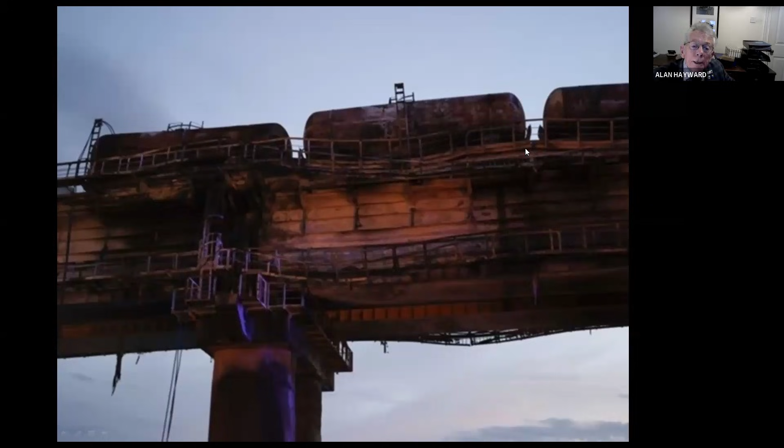So was the structure of the rail bridge damaged? There must have been some damage, but they apparently carried on using it with restricted loading and restricted speed until sometime later. The rail bridge is still there. They replaced the road spans, the 4 spans, and Mr. Putin said, I want it back by July 23. When in fact, he got it back in 57 days, which is remarkable - absolutely fantastic achievement. But the rail bridge, nothing, very hard to find out what happened.

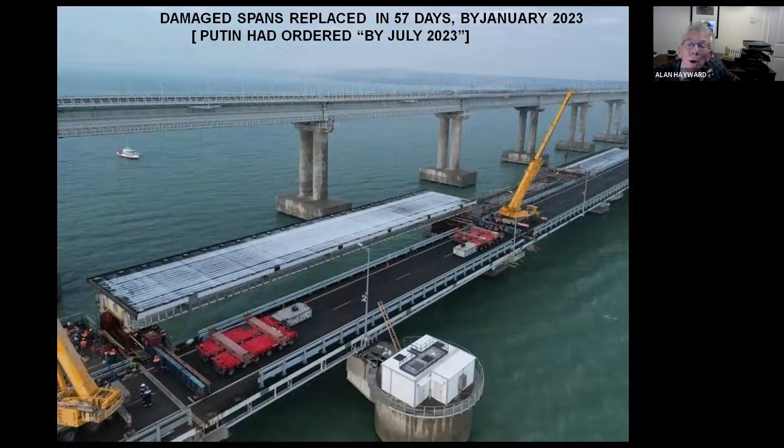But what is known is they replaced the one span that had some damage by launching new girders across in May 23. So they obviously were concerned about the rail bridge.

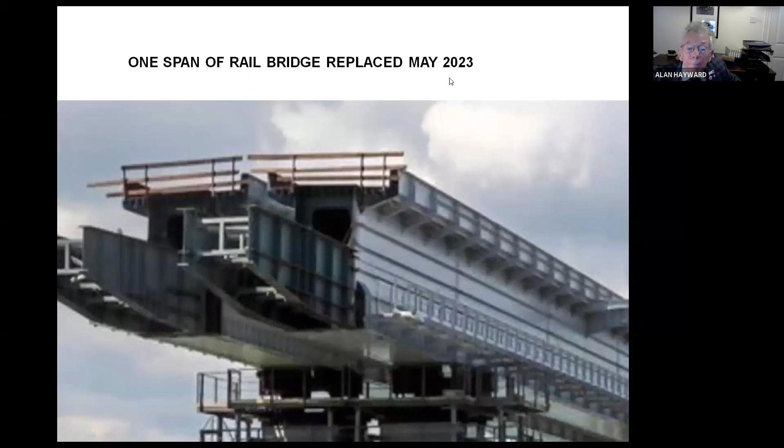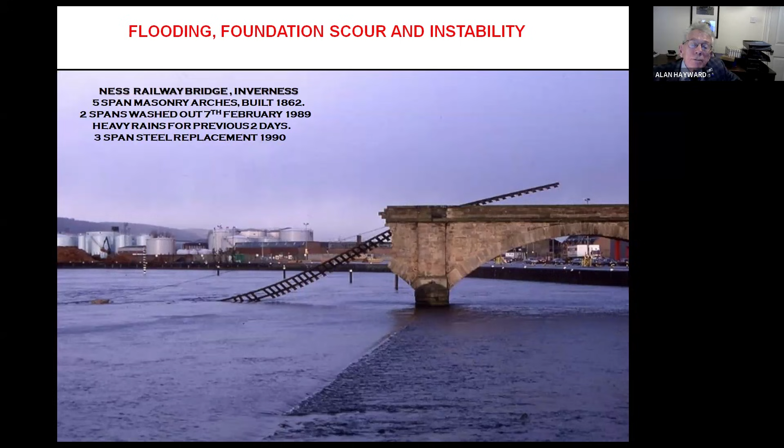I'll just quickly finish now, but what's hitting us now with climate change is flooding, foundation scour and instability. This goes back a few years - the Ness Railway Bridge - undermining of the brick arch spans caused the collapse. No one died, but it was pretty severe, and that had to be replaced by a three span steel structure.

There's nothing new about washouts undermining scour of foundations. This goes back to 1961, and an ex-colleague of mine from British Railways was concerned with this. He designed the replacement - it was caused by scour of foundations - but he did pile foundations and replaced the bridge. It just shows there's nothing new about flooding, but it's just getting worse.

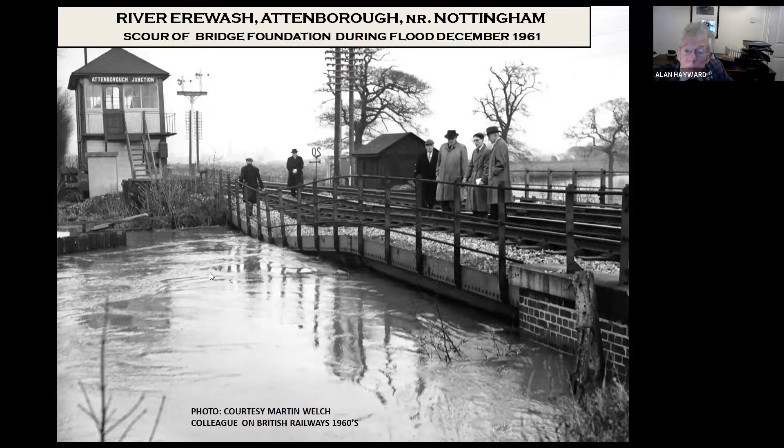Well, that's it. Thank you. I'm happy to answer any questions in a moment or two.

That's brilliant. Thank you, Alan. That was absolutely wonderful. Did you want to take a couple of minutes, or are you fine? Yeah, happy, I'll be back in a couple of minutes. Okay, great.